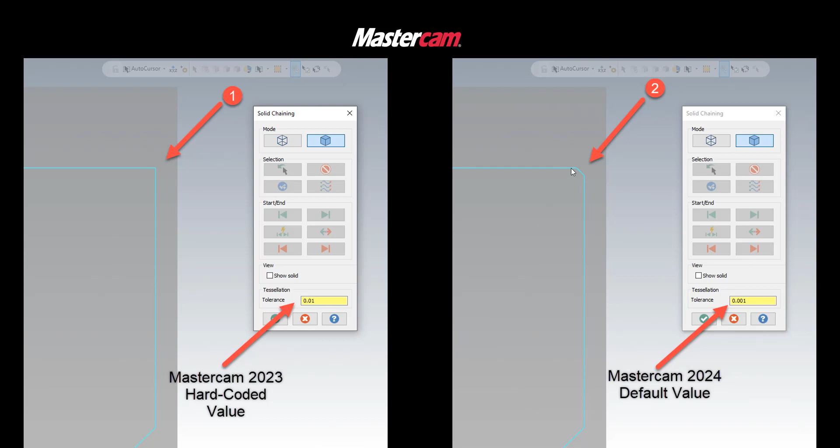The first enhancement we see in Mastercam 2024 is a solid chaining tolerance. In previous versions, if we did solid chaining in lathe, the tolerance was default at 10 thou and was locked. We couldn't edit it, making solid chaining difficult to use at times. In 2024, the tolerance now defaults at 1 thou and it's an editable value, so now I can pick up smaller features and tighten and edit the tolerance as needed.

Also in 2024, we see some enhancements to the roughing pattern. I get variable depth in my rough turning. I've had this function for a while, but it was limited to plus or minus 25%. It is no longer limited. I can go all the way to 100%.

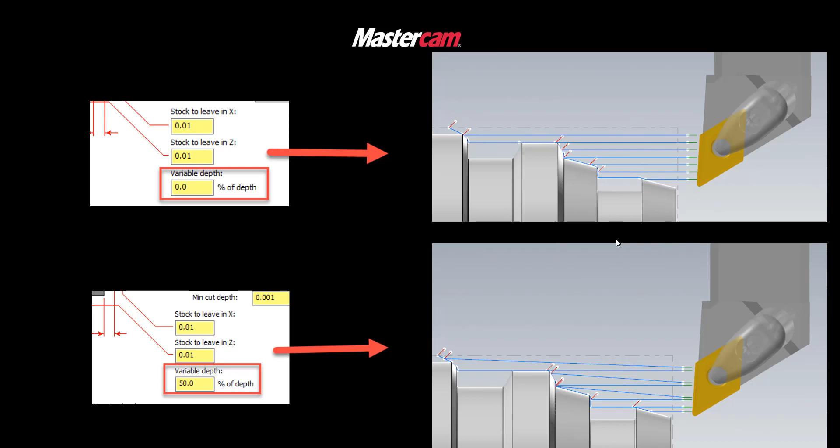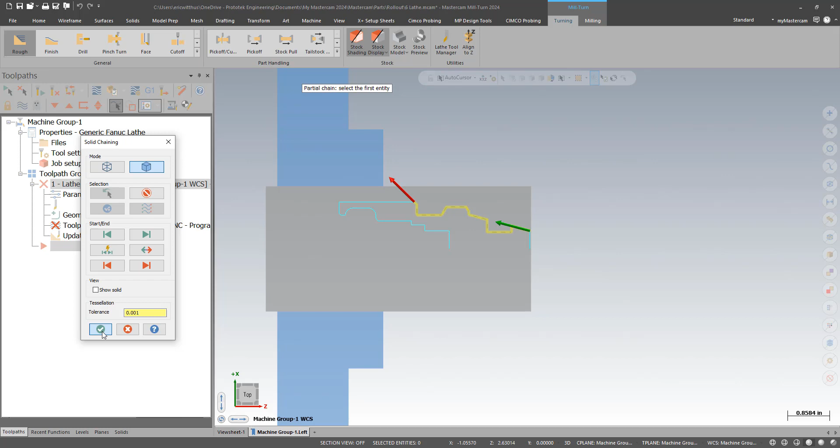Let's take a look at these couple of functions. So here I have a part set up. I'm going to do a rough turn on it. Here's my solid chaining, a new default tighter tolerance. I can tighten it, but this tolerance is tight enough to pick up the features on this part. I'll say rough from there to there. So there's the new solid chaining that exists before. The tolerance is new.

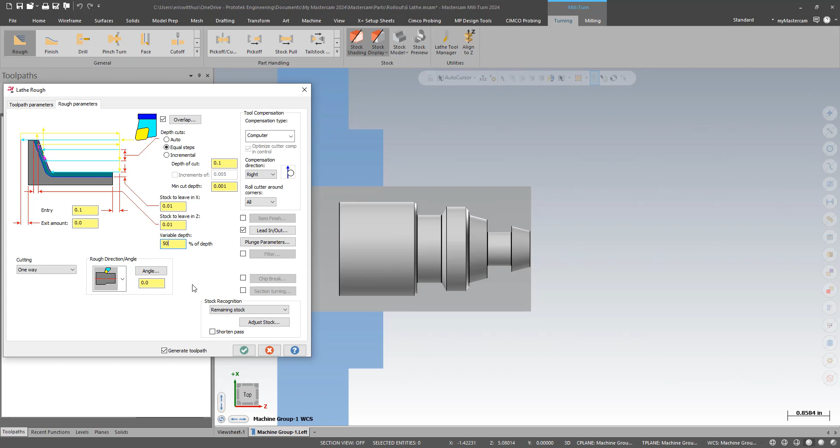And what also is new here is I can now do a variable depth of cut greater than 25%. This used to be limited at 25%, but now I can go to say 50 or 100%. So if I put that at 50% and take a look at this, it starts at my 100 thou depth cut and then reduces the depth cut by 50% during the cut. And then the next path is straight. So it starts with a lighter cut and ends up with a deeper cut. Here's the deeper cut and then go to lighter.

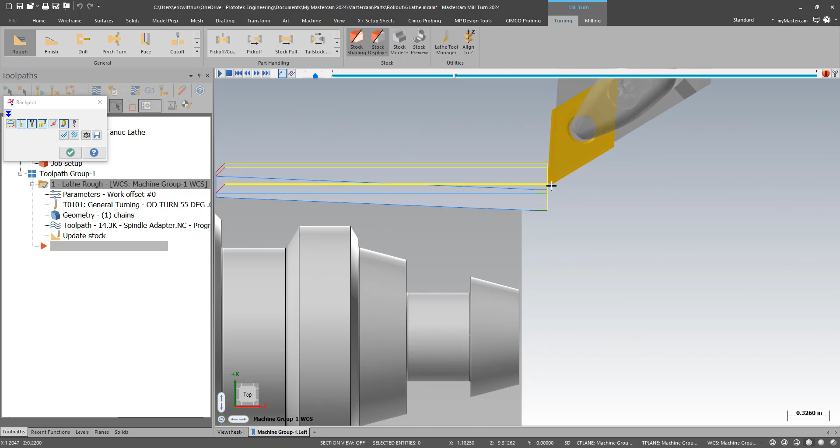And the idea behind this function is I'm changing where the chip breaks along the insert to help increase insert life. So we've had this for a while, it's just that we can now go to greater percentages, or I could even go all the way to 100%.

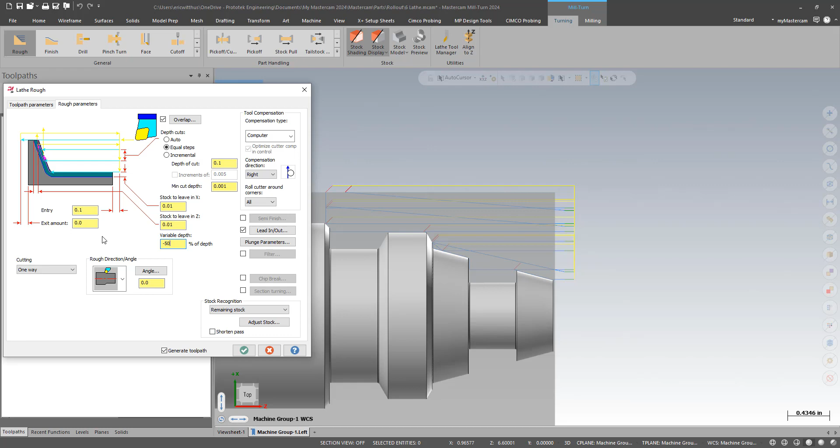So now I basically start with a 100 thou deep cut all the way out to basically 0, and then the next one is straight, so I'll start with nothing all the way to the 100 thou. I can also go negative. It just reverses the pattern, so I'll do negative 50. That reduces my cut depth by 50% at the beginning, and then I get all the way to my full depth at the end. But then the next pattern, the next cut is straight again too. That basically gives me variable locations along my insert where the chip is breaking to help increase my insert life.

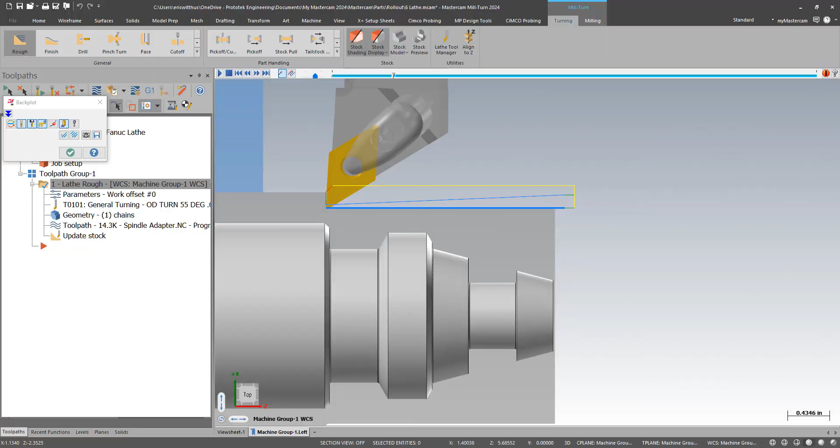We also see some enhancements to the B-axis contour. The B-axis contour is only available in the mill turn product, and to utilize it, you do need a multi-axis head, something that has, say, a B tilt. The B-axis turning was new a few versions ago, and we're continuing to see enhancements made to it to make it better, more usable as we get feedback.

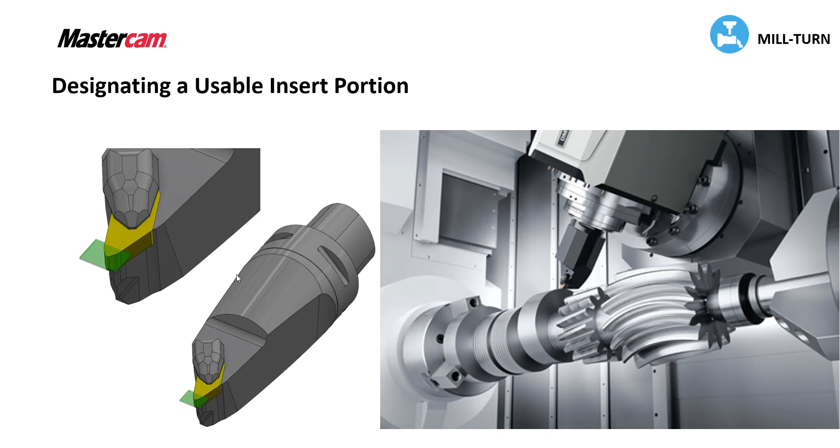In the past, in the B-axis contour, we just could define a usable depth for the insert. There's an automatic function in it where it uses that depth to figure out the tilting angles and adjust the tilting angles while cutting. We now have a new interface and we can do more than that. We get kind of point-to-point control. Here's what it kind of looks like.

I can go in on the advanced motion control. Instead of just having the old depth option before, now I have a manual option, and it takes me to the screen where I get a green and red dot, and I can just drag them. So if I want to use more of one side of the insert and less of the other, I can now do that. In the past, I just set depth, so it's basically equal on both portions of the insert. Or I could also drag this red dot near to the tip of the cutter and say, just try to use the leading face to cut.

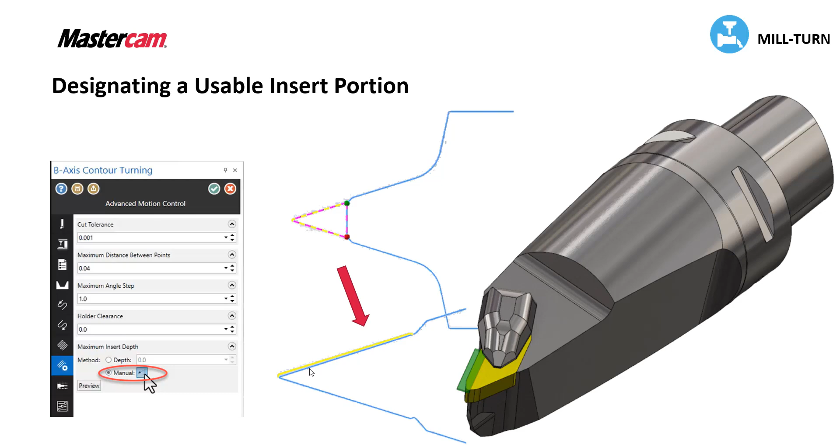I also, to my B-axis contour, get adjust stock. Users that have been using Mastercam Lathe for a while, this function is available in our other toolpaths and our roughing, so it wasn't in B-axis turning before. It's been added, and they updated the interface. It's kind of this dot function again. We kind of had trim one way or trim the other way, and the wording was a little confusing. Now it's just a nice graphical user interface. It behaves the same, it's just a different interface element.

I like this new interface. I'm kind of hoping to see this in the other portions of the other toolpaths as well, that this makes its way into the other turning toolpaths for adjust stock. This drag and drop dot only gives you a few options, option A or B, but it's just more user friendly and graphical, and instead of kind of guessing what button to hit, it's way easier to use.

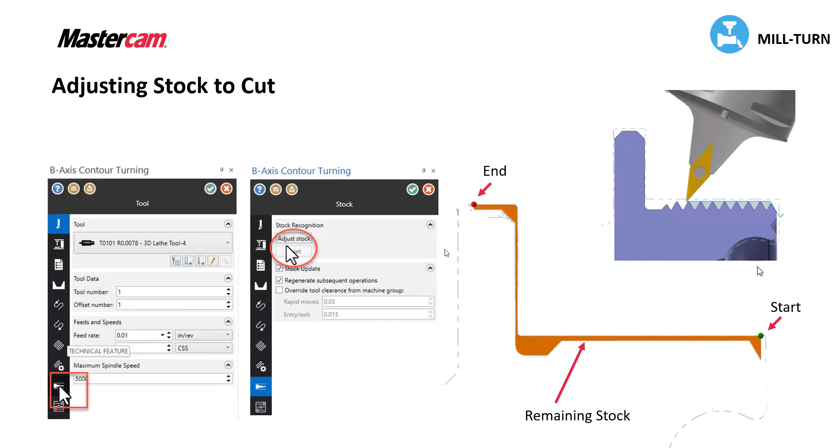One of the coolest things they added to the B-axis, in my opinion, is we've always had the ability to have automatic or manual mode. But manual mode, I had to draw axis control lines, kind of reminiscent of the curve 5-axis toolpath, but I had to draw geometry and then pick it.

What's new in 2024 is, there's still this automatic mode, but we can go to modified, down on the bottom, on the basic motion control page. In modified, it just gives me green arrows, basically what it figured out for its automatic mode. But I can go into modified and click on those arrows and move them. I basically had this control before, but I had to draw a bunch of geometry. Now I can do it live on the screen without drawing. It's really quite neat.

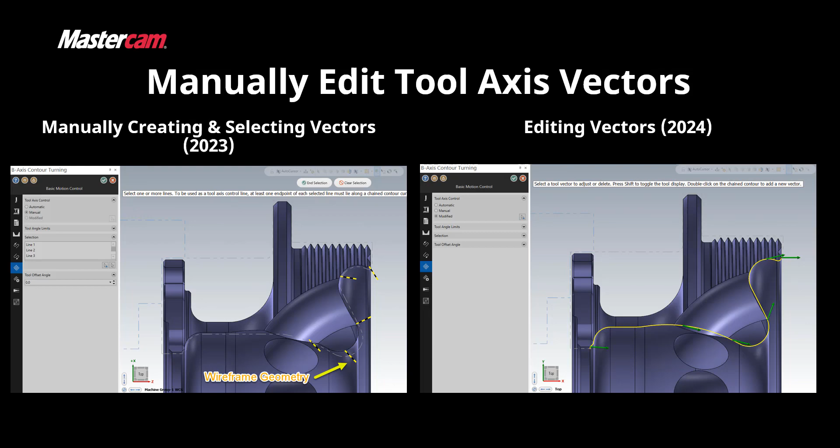So in this file, I have a B-axis contour turning the inside profile. To see the inside profile, I'm going to go to my planes here and turn on my section view, and I have the top set as a section view that slices the part here. That was a new enhancement a few years ago, but I can see the internal features of the part now.

This internal shape, without a B-axis head in the machine and this B-axis contour, that'd be essentially impossible to cut with one tool. But with B-axis contour, I can tilt the head while cutting, and now I can achieve cuts like this.

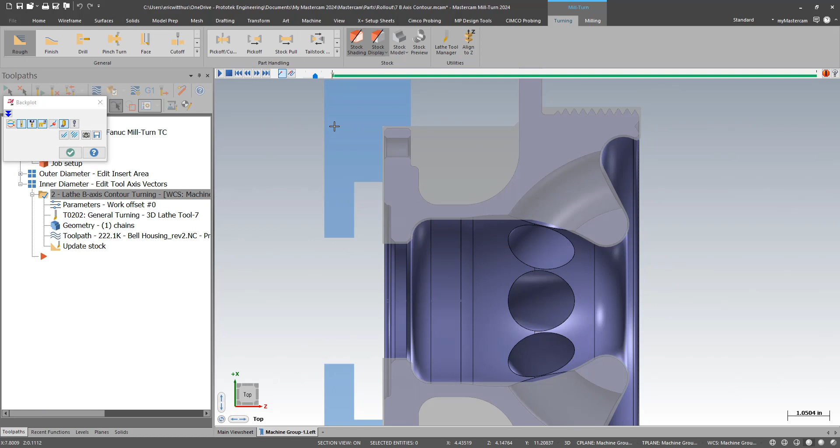So right now it's just on the automatic mode. And I can see it's already kind of an angle, but it can tilt the tool. Here we can see what it can do - it can tilt the tool while cutting. Once I get into here, I wouldn't be able to reach it at that angle. But if I tilt my tool, now I can reach it. So that's the automatic mode.

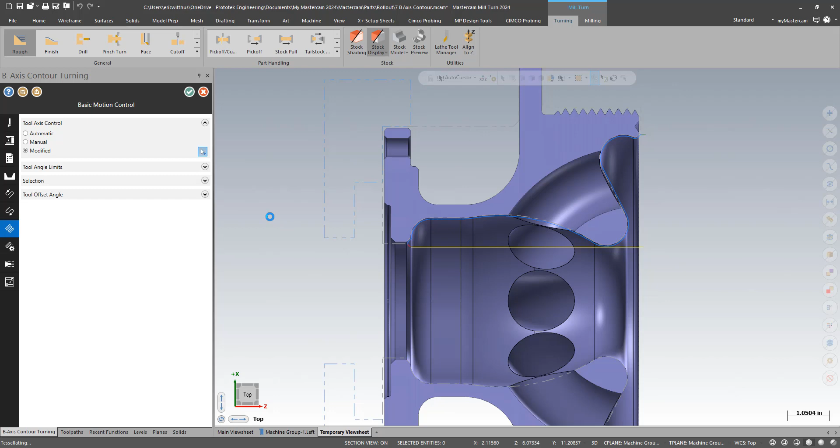What I have now is I can easily edit that without having to draw geometry. If I go into the parameters, I can go to the basic motion control page, and I now have modified. I can hit the white arrow, and it pops up green arrows on the screen, basically using and blending for axis control lines. I can click on any of these arrows, and I get a preview of the tool, and it stops upon a collision - it won't let me collide. It kind of stops there, but I can manually edit it.

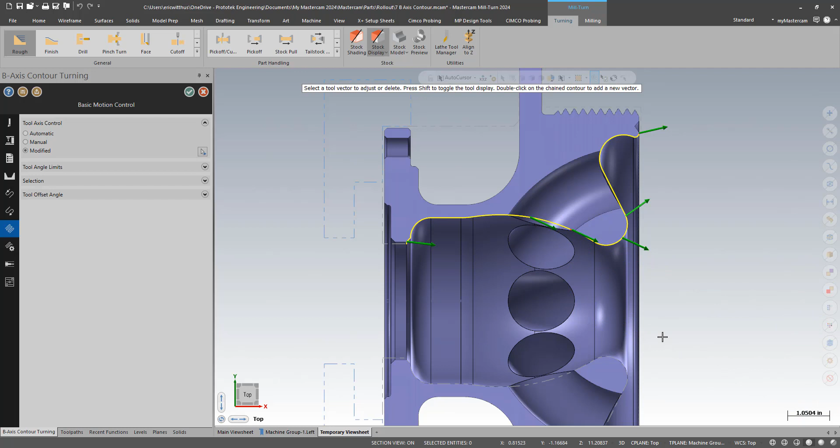If I want to add extra arrows anywhere, I just double click where I want to add an axis control. It shows me basically where the tool is tilted there - it's just the average between those other two arrows, but then I can modify that as well. So it just gives me real quick, easy ways to modify it. It's really slick, a great new enhancement to the B-axis contour.

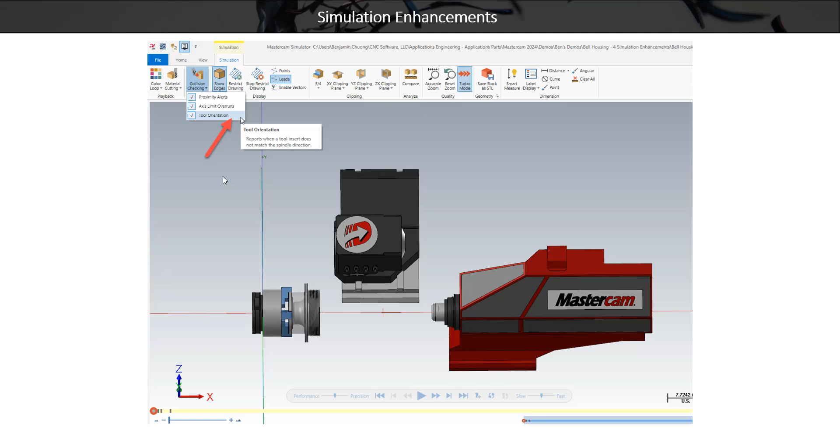You do need that 5-axis head to do something like that in the turning environment. We also see some simulation enhancements to the mill turn product. In our previous video, we looked at simulation and verify enhancements - those same ones are in mill turn and machine simulation. We have some extra ones specific to mill turn, as we can now do collision checking and a stop condition based on tool orientation.

A few years ago, we had enhancements where we could build 3D lathe tooling, and that has greatly expanded what we can do with our lathe tooling in Mastercam. It's been a great enhancement, but it's a little bit of a process. You have to define how the tool is mounted in the machine and the insert up and down direction, and sometimes people miss a step and make a mistake.

If you don't define that right, it'll try to turn the spindle the wrong way, and sometimes that would get missed - and that's not great if you go to the machine. So this helps catch that before getting to the machine. You can turn on the stop condition or collision report for tool orientation being wrong, and if it sees that the spindle is trying to spin opposite of the way your insert is facing, you'll get a warning here in simulation. That basically means you built your tool wrong.

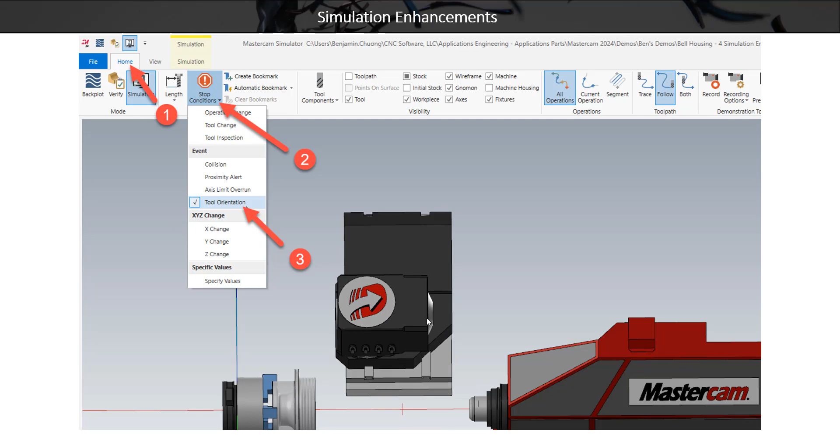You've got to go back and fix your tool to fix this error. So that's a neat enhancement to help catch mistakes before they go to the machine.

Also in 2024, we gain mill turn angled head support. This is for turret machines - there's a picture of it in the machine there and some pictures on the side. They have things where I can add basically aggregate head tooling to my turret machines, and we can now support that in the mill turn product in Mastercam 2024.

Now this does not just automatically work - you would have to have an updated post, and post changes need to be made. For the mill turn product, we get some generic tool locators in the file, but sometimes we've got to add tool locators for what we have. You'd have to have a tool locator built for the angled head.

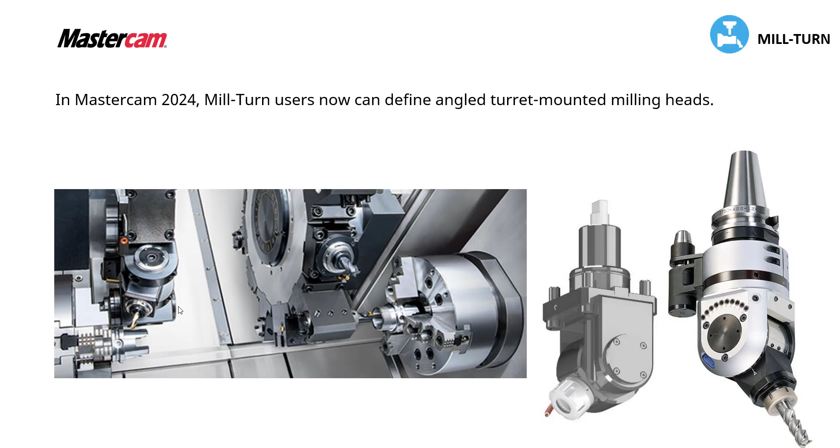So it does have a few prerequisites on it, but now I can program, code, and simulate angled heads and turrets in mill turn in Mastercam 2024.

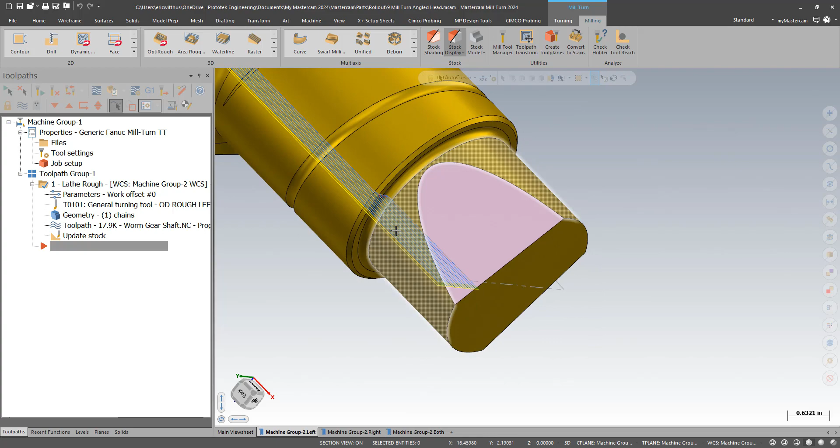So here I have a turret machine loaded up, and I have some angled faces, and I would have to 3D that unless I had, say, an angled head in my turret.

So I'm going to do it like I have an angled head. I'm just going to do a facing path, chain that, select a tool. And now here's where I need to tell it's an angled head.

There are a couple methods of doing this in Mastercam Mill, and this is similar to router, and similar to one of those methods. So this isn't completely new, but there are different ways of doing it.

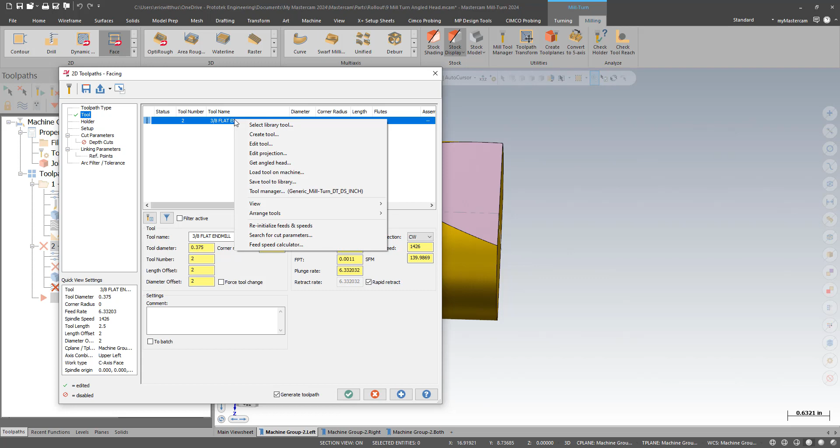So here, I have to right click on the tool and say get angled head. That takes me to the tool loader page, similar to hitting this button back here. If you're using mill turn, this page may look similar.

What I have, as I mentioned, I have to have these built as a locator. So I do have locators built here. I'm going to run this in the upper turret, so I've got to scroll down to my upper turret ones here.

And here I have a live tool aggregate head built. So I'll expand my upper turret and take a look here. I'm at tool number 2 for this 3/8 end mill, so I'll drag this aggregate to turret station number 2.

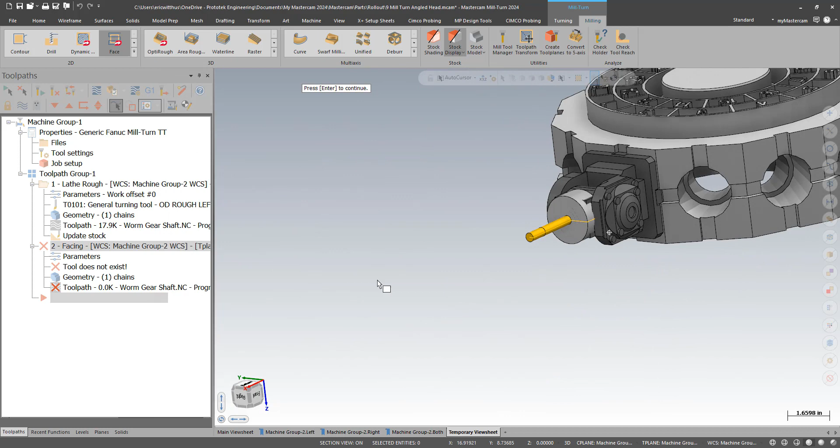And then I can drag this tool onto that, and then this is the same as my tool loader function again. I could say view component and children, and see kind of what that looks like on my machine, and these can be adjustable.

Usually you kind of set them and lock them, but you can see how that one's straight. This is set up as adjustable, and when you define it, you have to define the center of rotation, so this can be used for multiple angles.

Now at the machine, it probably can't be used for multiple angles because it's probably locked in. But it does make it versatile, so you don't have to build one for every angle.

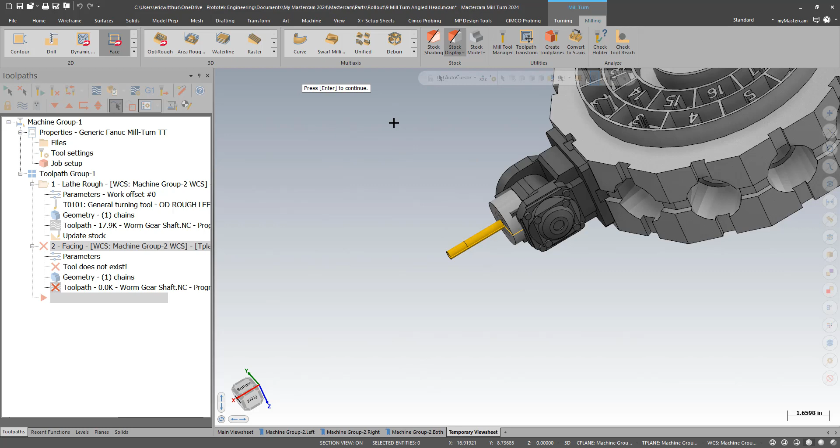And then I can continue on my process. Once I do that, I get a new option. Normally I wouldn't have plane rotation on a turret machine here, but now because I got that aggregate put in there, I can do a plane rotation.

And this is an awesome function in mill turn. If you haven't seen this, it's one of the great workflow enhancements. If you're looking at what I was doing, you might think you need to build a plane before you do that tool path. That's true in milling, but here in mill turn, I picked enough geometry where I can just derive a plane from that geometry.

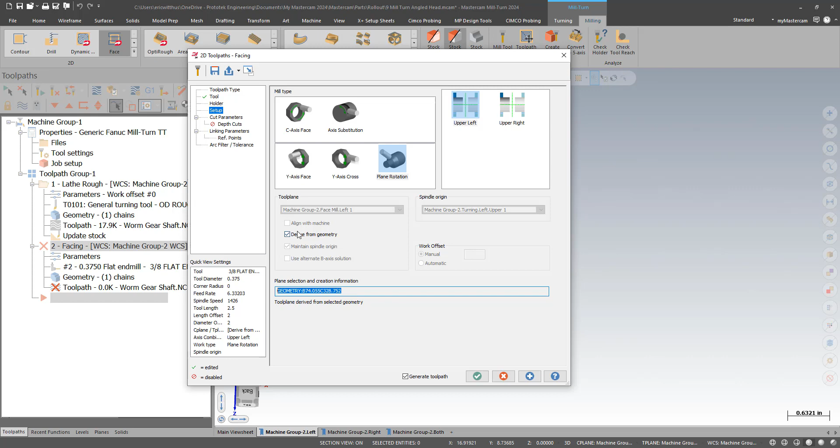I don't even have to build a plane first. It'll build—here's the name—this plane on the fly just as part of my toolpath. It's really slick and awesome. That's not new in 2024, it's just a great feature.

I'm going to go to my cut parameters real quick. I'll probably do a zigzag, and then if I just preview that, I'll have a few issues here.

Maybe I want to change—I'm kind of running into that flat there. So I'll change my cut angle to 90 degrees, and then this is how far it goes over it. Maybe I can't go quite that far over the edge, so I don't run into that larger diameter. I'll preview that—that looks pretty usable.

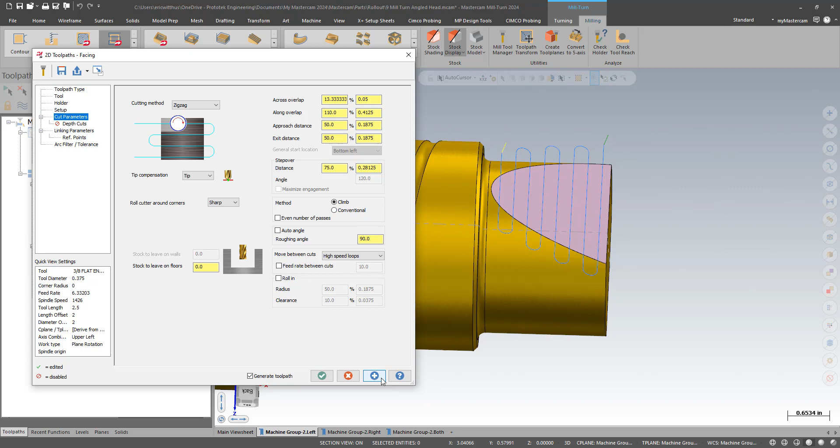I probably don't need to worry about even number of passes. There we go. That should backplot and verify, but I'm going to show it in the machine sim.

If you're not familiar with mill turn, this is a little bit different workflow too. When I hit the G1, it doesn't post the code. It takes me into Code Expert, where if I have multiple turrets, I can put in wait commands and then post the code or run simulation.

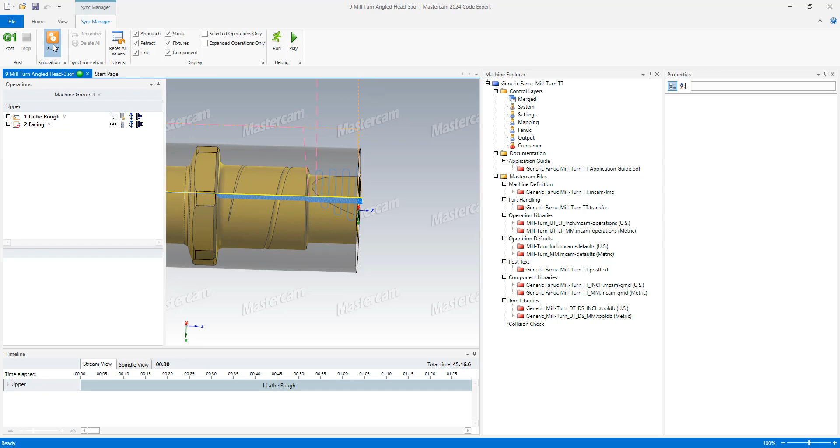So here's where the G1 button takes me. I don't have any multiple turret cuts in here—I didn't add any cuts to the lower turret. So I'm just going to take these cuts and launch simulation, or the G1 button there can post the code.

Often for the simulation, I like to hide the housing so I can see the components a little bit easier. Here's where we had some new enhancements too—we can do the tool orientation stop event, or add the tool orientation to one of the collision checking options. I'll play my simulation.